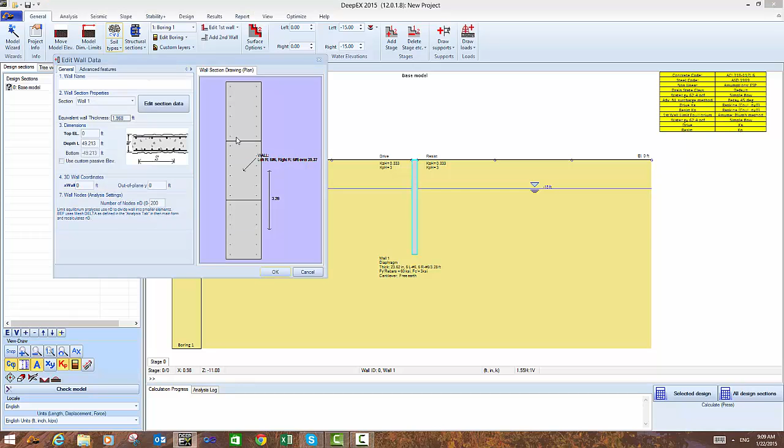We'll double click on the wall. We'll click Edit Section. We'll select the secant pile wall with steel beams. There's different secant pile wall options. This will constitute the soil mix wall. We'll select the 2.5 foot diameter and space the piles at 4 feet on center.

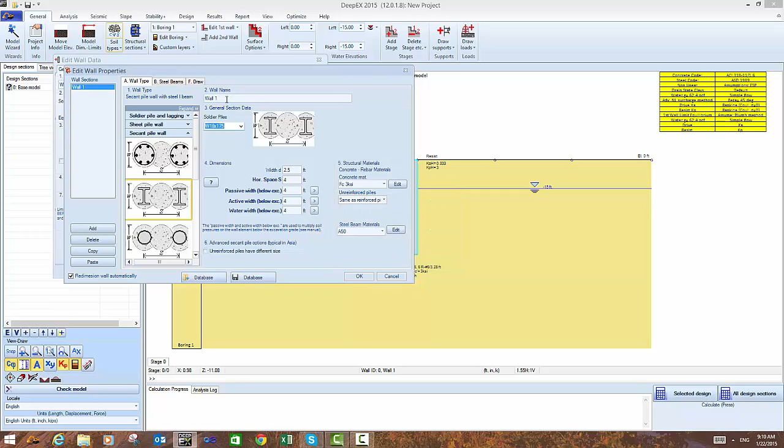We can start with a section at W18 by 175. We won't change the spacings of the pile, so we'll keep everything the same. We can go to draw and look at what our wall looks like. We'll start off with an initial wall length of 50 feet and we'll progressively build our model.

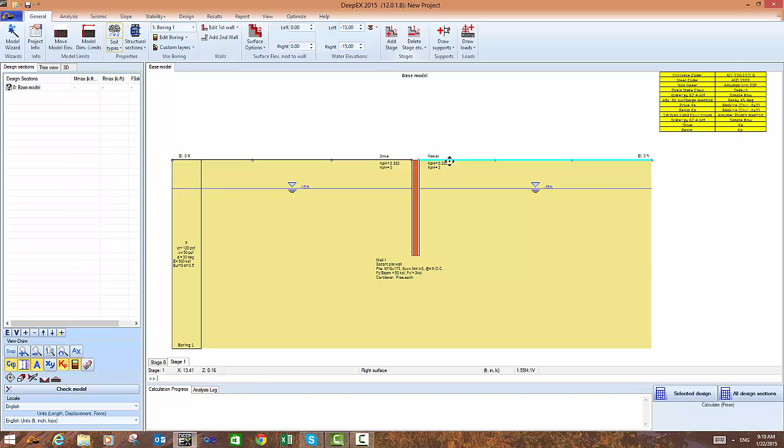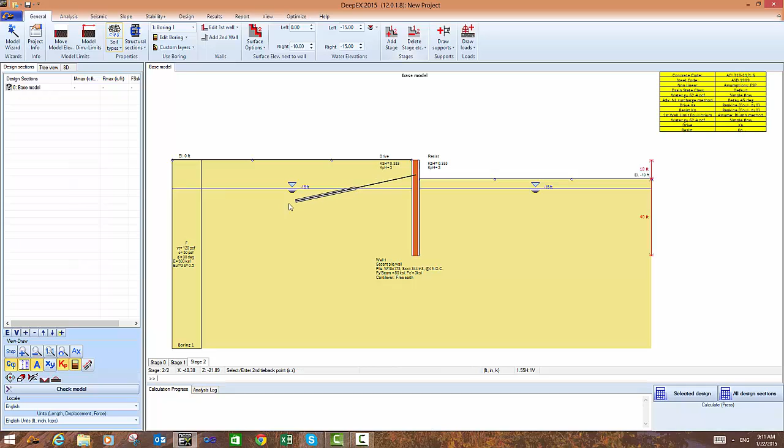So we'll go add stage, excavate 10 feet by dragging on the surface. You can also change the elevation here by typing -10. We'll right click, add a new stage, and here we'll draw a ground anchor. We'll first click on the wall, then click on the ground surface.

We'll change the elevation to -8, the inclination to 20 degrees, free length to 30, fixed length to 25. Let's put an 8-foot spacing. And we'll put a pre-stress here just to start off with, 70 kips. That can only affect the nonlinear analysis, but we can always change that.

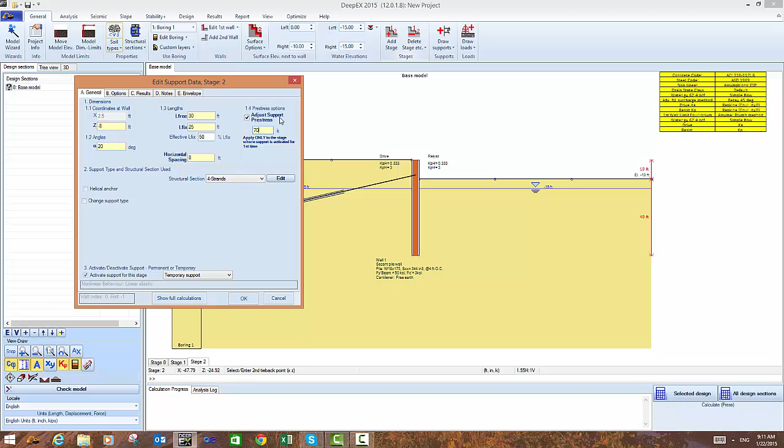Now we can double click here and also change the soil profile. So at -15 we're going to put another soil layer which we're going to call S1. We can edit here on the soil properties. We have it as a sand, silt we'll put as a sand.

We have a total unit weight below the water table, dry above the water table, an effective cohesion, effective friction angle, elastoplastic properties for the nonlinear analysis, although this will be done later, and an ultimate bond resistance for the tiebacks. Let's put 30 psi here. Now this depends also on the soil type and your construction methodology, but you can always pick up values based on various recommendations.

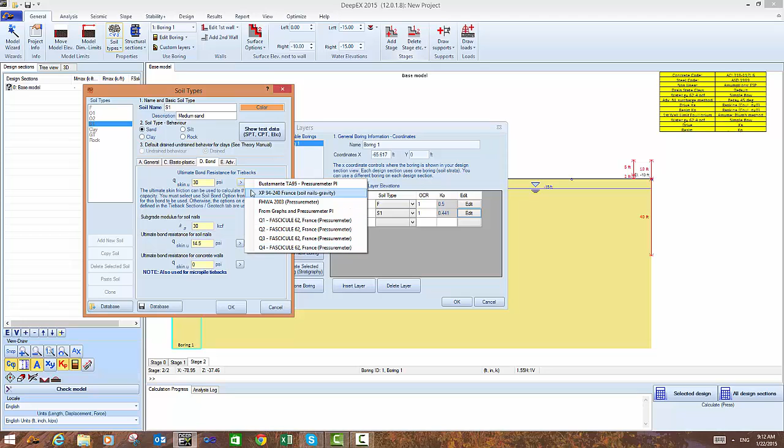We'll right click, add another stage, and we can go in here and type -30 on the elevation. Take also down the water table, so let's do some extra dewatering and say we're going to be dewatering this to -35 so we can keep a dry excavation. We can also go and draw a construction load,

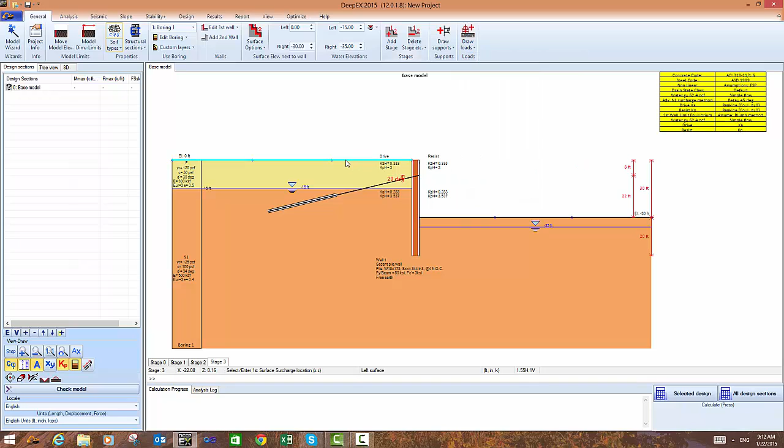draw surface strip surcharge, select one point on the ground surface, select another one, set the coordinates, name this construction load, 0.6 KSF, 600 pounds per square foot, surface load. Now you can right click on anything, deactivate, right click, activate. Same thing with the tiebacks, right click, activate and deactivate.

Now it is important to go in the analysis tab and switch the analysis to limit equilibrium. This way our optimization for the wall embedment can take place automatically. In the nonlinear analysis, the program will not automatically optimize the wall embedment because there are soil-structure interaction effects. If you had clays, we could change between drained and undrained. We could also do a full flow net analysis, although right now we're doing a simplified flow.

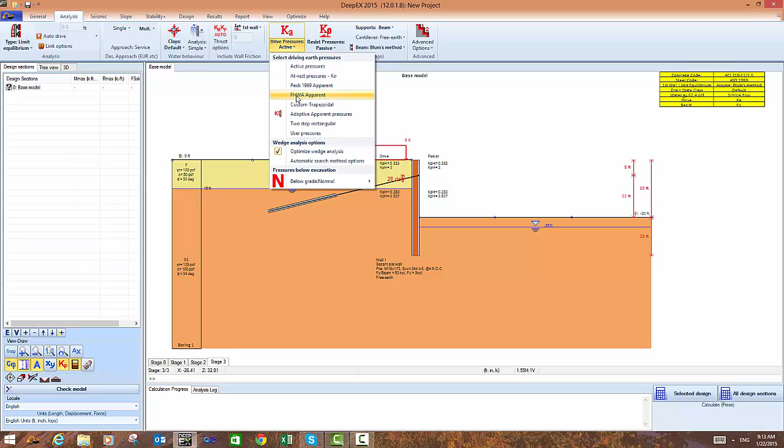Now since we have a stage where we have at least one support, we'll select the FHWA apparent earth pressure method. We can click inside so we have further options, but we can see basically our design assumptions here. We'll go on design. We'll make sure we use US allowable settings.

We have US members. We'll optimize the wall embedment. We'll target a safety factor of 1.3 for a temporary construction. Of course, you can change on the design tab that required safety factor. This DL is an increment on the wall length. And with that, we're basically ready to analyze this excavation.

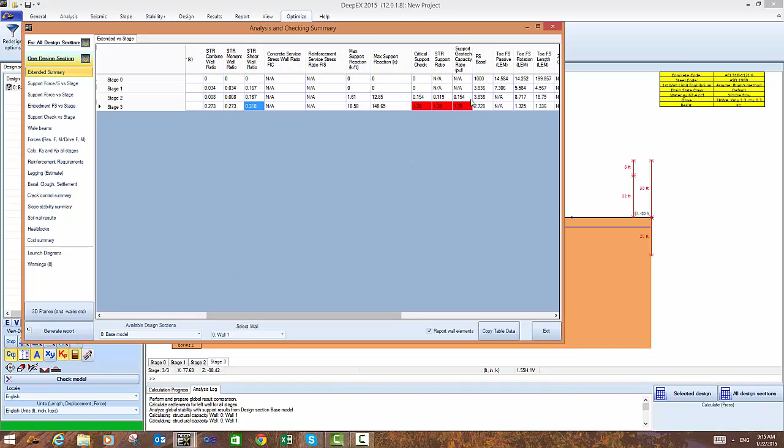We press the calculate button, and we're seeing what the expected displacement is, the wall moments per foot of wall per beam. We're seeing that the structural ratio is quite conservative on the walls, on the moment capacities, and we're also seeing that we're overstressing the tiebacks in terms of the pull-out length. This is a stress ratio here. We can go on one design section and see these results on every stage and see where the reds are.

Also, the program has optimized the length of the pile, and now we have a 12-foot length here for the wall embedment. Of course, there are some other aspects that you have to take a look at, but what's critical here really is that because we are dewatering, we're obtaining adequate safety factors at smaller wall embedment. If we were not to dewater, that would be a different case.

So once we have established this, we can actually go and optimize the whole design section. So we can say optimize design section. We'll have to wait a few minutes while the program is checking to optimize the tieback length, this tieback section, as well as the wall section.

Now what we're seeing here on the screen is the moment diagram, the support reaction, and the red line here is the design capacity. You can actually move your mouse on top of it when the program is active and not doing the optimization as it's doing right now, and you can track any value at any elevation.

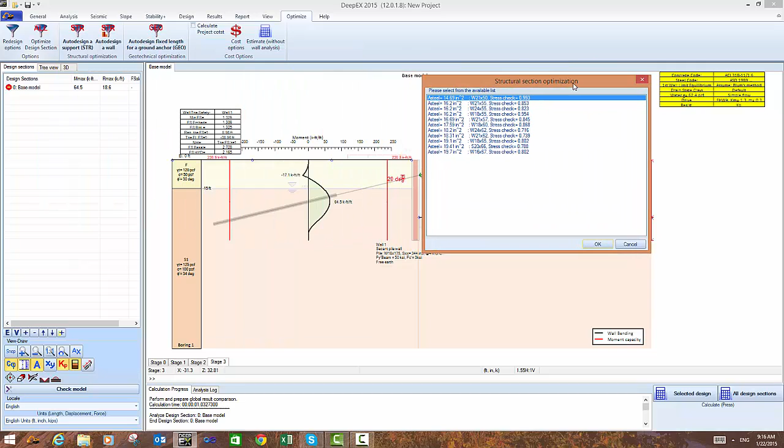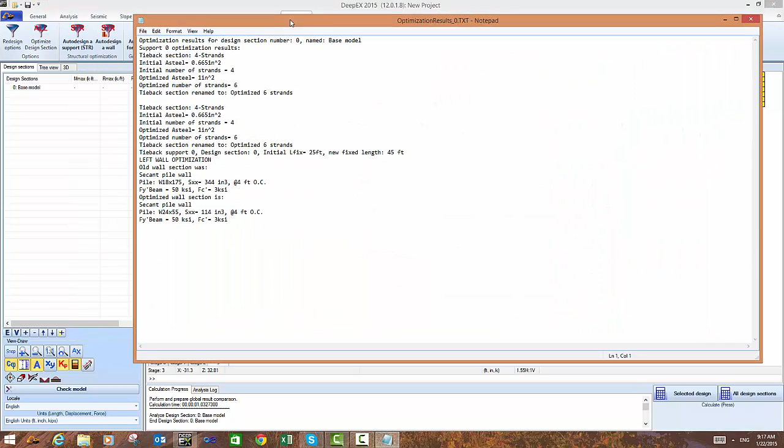So now the program has actually come back and it's saying, look, you may use a W21x50, and you could use different sections depending on what you want, and these are your savings. Let's say we don't want to go that low because our displacements are also being affected. We could select a W24x55. Also, our strands are being optimized. Initially we had 4 strands, the optimized is 6, and the program also optimized the tieback length.

So we can rerun this analysis, but just to make sure, we take out the optimization. We will double click on the wall and make sure that we round this to 45 feet. Press calculate and make sure that our stress checks are fine. We will look at the displacements and so on. And on our tieback, everything appears to be fine.

With the moments on the wall that we can track, the horizontal soil pressures, the net horizontal load on the wall, water pressures, and surcharge pressures.

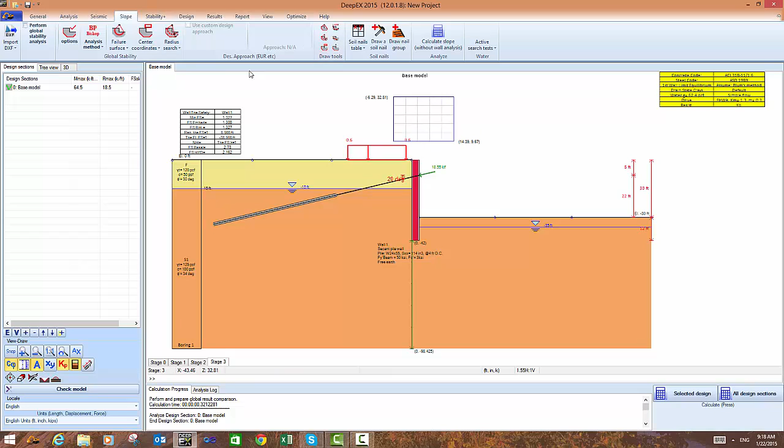Now we could go on slope and select to perform a global stability analysis. This is a circular option, Morgenstern-Price, and we can see a global stability circle if we wanted to.

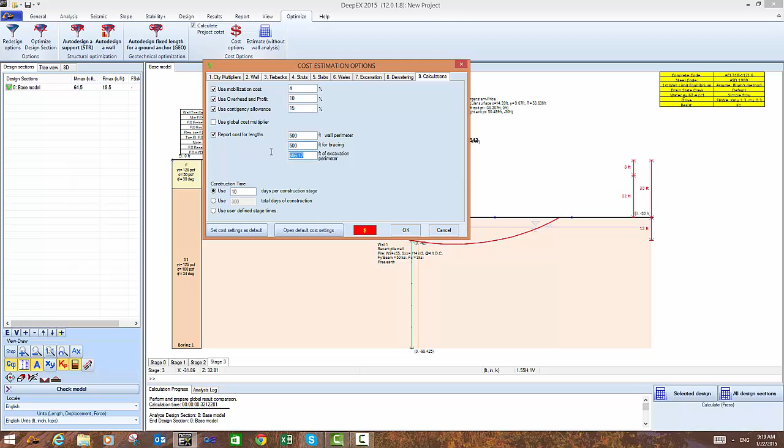Additionally, we could go to optimize, select to calculate the project cost, go to cost estimations, and select our location. Let's select New York for this example. The program picks up the cost installation factors. There are different inputs here that you could change for tiebacks, walls, struts, in terms of installation and material costs. You can use overhead and profit, specify the length of wall perimeter, of bracing, and of excavation perimeter. And calculate the whole project again.

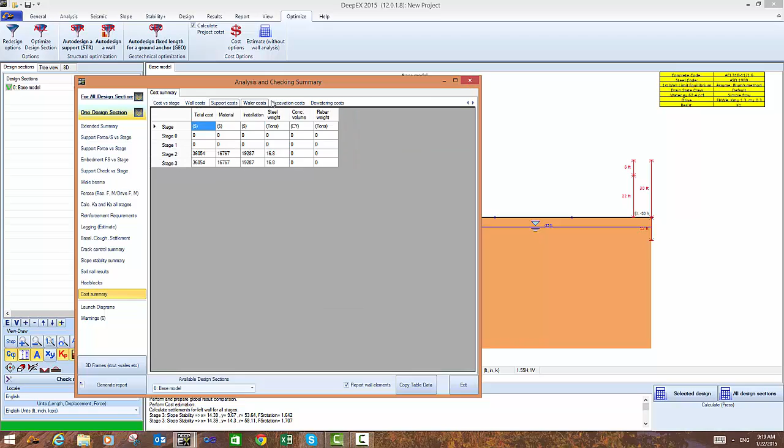And go back to the results, on the cost summary, and get a project estimate for the costs based on what we have defined, as well as a detailed quantity takeoff. Now, a full quantity takeoff can also be done with a 3D model, but this is covered in other videos.